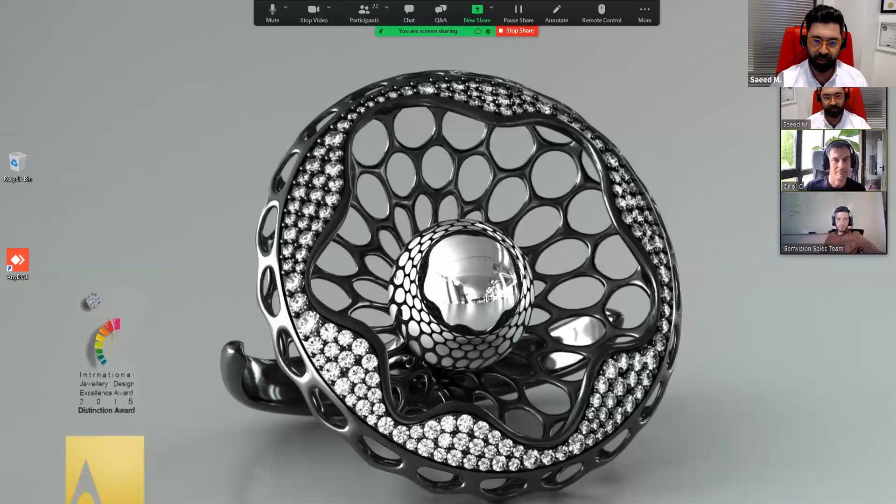Yes. Okay, so today I'm going to say some important things about the jewelry collection we did. Some of the sketches and renders—we always start from sketches, and then we make a 3D print, a 3D model in Matrix. I'm going to show you some of the sketches we are working with.

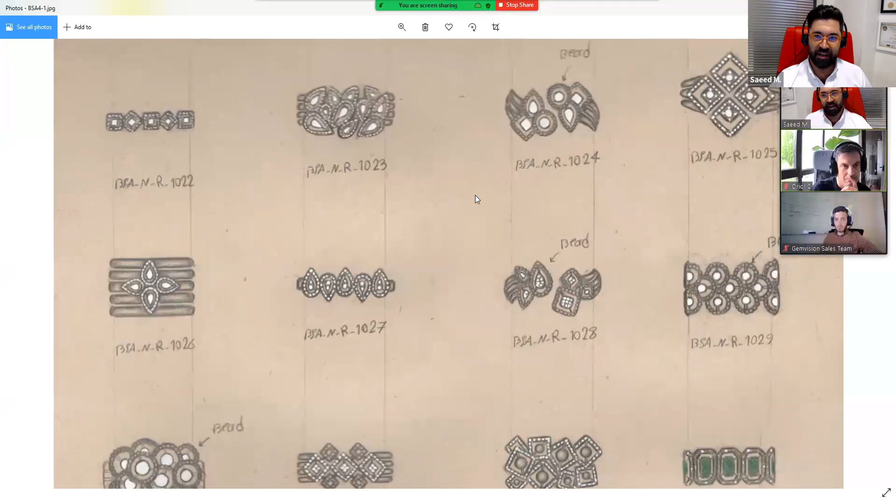We always start from rough sketches, something like that on a piece of paper. So we are going to start. Today we are going to start to work with some rectangles, pear shapes, or circles. This is the main rough idea, and then we make it a little more finalized, the sketches, and then we do the 3D model and make renders.

This is one of the biggest projects we did. There is a book, a brochure or catalog, with all the models done in Matrix and MatrixGold. Also this is the books Oriol talked about, these two books which we are converting to MatrixGold. As soon as it's ready, Gemvision can share it with the Matrix license owners.

Some of the designs I did in Matrix and MatrixGold won awards in countries like Hong Kong. Also, I did a bookshelf in Matrix, and it won a silver award in Italy. This was the bookshelf.

This is the plotted version, 2 meters by 2 meters, and this is the real one, with a carpenter who did it. This is the actual bookshelf—it was one of the most lovely things I did.

And yes, we've done many models—this is not the render, these are the models we made with many color stones, many models. This is the ring which won 2 awards, in Italy and Hong Kong. We've done many models in Matrix since 15 years ago—more than, I think, I didn't count it, but I think more than 20 or 25,000 models.

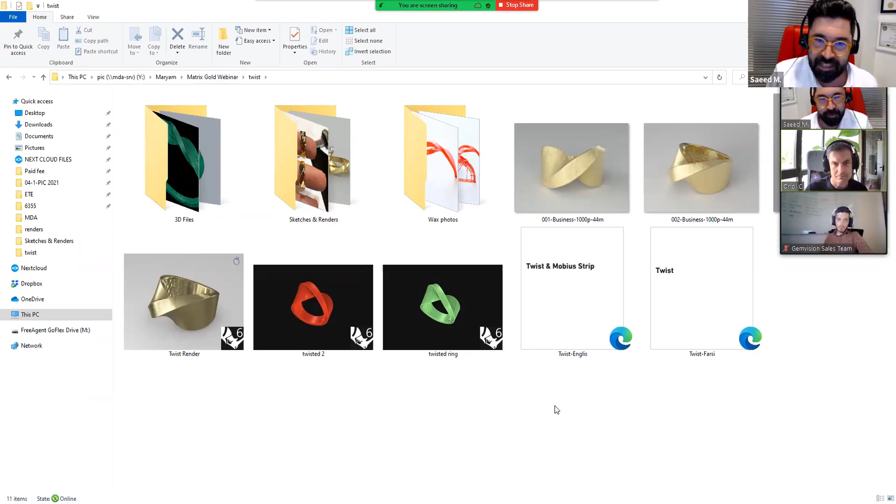So today I want you to see MatrixGold in action, and I chose a concept which is very important in jewelry designing: this is the Mobius strip. A Mobius strip is a sort of strip which, if you have a strip of paper for example, and you rotate it 180 degrees and connect two edges together, you will have a one-sided surface. There is no top and bottom of the surface. So if you start from one edge and follow the edges, you will come back to the same point again.

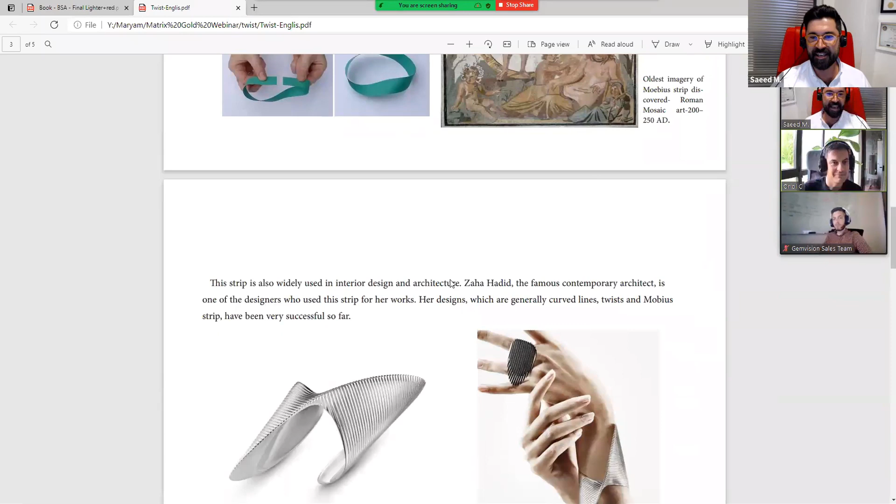And many famous designers and brands, famous architect Zaha Hadid, she did Mobius strip in this cuff bangle, and also Georg Jensen. This is what I did before, and these are the sketches based on the Mobius strip when you twist it.

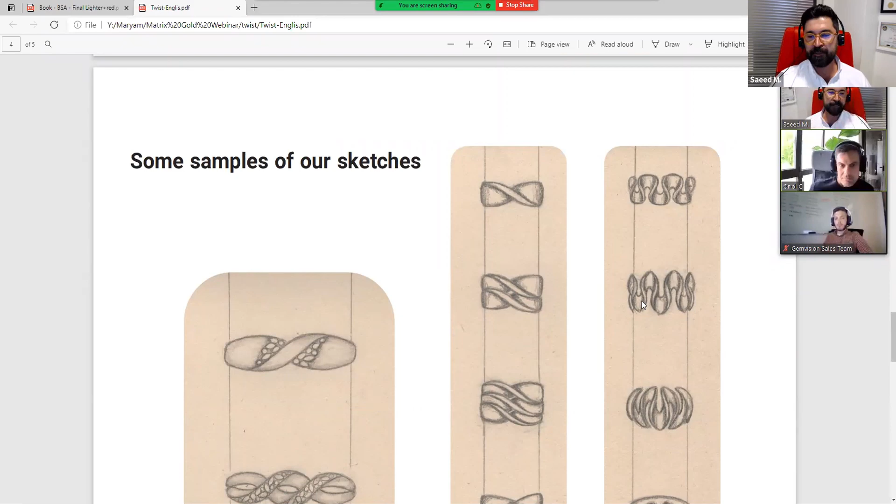So today I'm going to make this ring, with some tricks in MatrixGold. I'm going to show you how I can do it in MatrixGold.

I love all the history behind this model. Saeed, I really appreciate that, because it's nice to see how you get all the inspiration and how you then start to design the model. So thank you for that. It's very, very cool.

So for the Mobius strip, or for twisted shape things, I'm going to open up MatrixGold. I didn't change any user interface of MatrixGold, just some small changes. I just moved the command bar from the bottom to the top of the viewports, old-fashioned as I am.

This is one of the cool things about MatrixGold - people are always wondering, I'm used to the old software, but one of the peculiarities it has is that you can move all the windows from the left or right side of the monitor, and customize and do whatever you want.

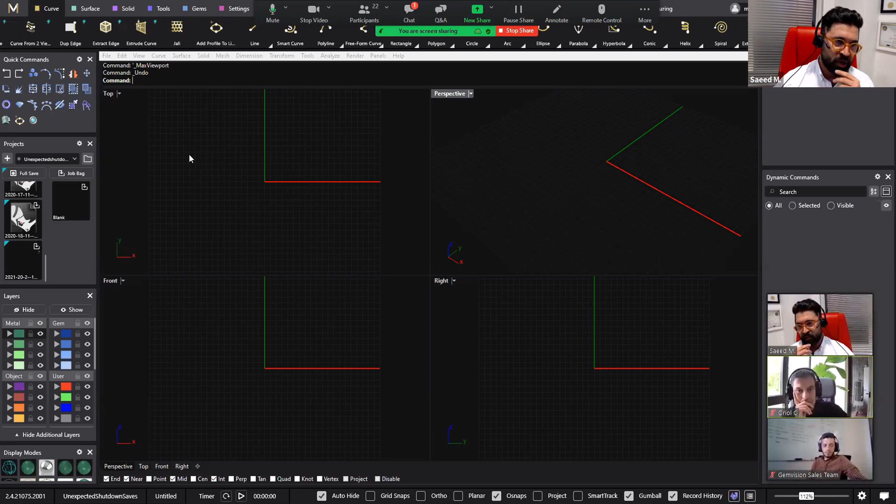Okay, so for every ring, when you want to start the model, you need the ring rail. So I'm going to start with a ring rail from the quick commands.

I'm zooming, is it okay to the people? I use some zoom. Yeah, it should be. Just kind of go slowly, that way the screen doesn't jump around. But yeah, it should be fine.

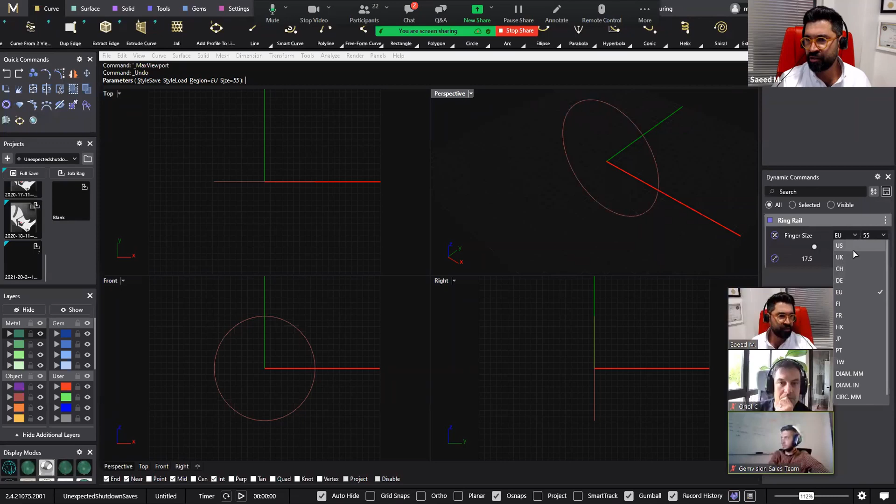Okay, so I'm going to start with a ring rail from the quick commands. It's very useful in MatrixGold. Click on the ring rail. Here we're using the EU region, so for size, for example, 55 ring rail size is equal to 7 in the US.

Also, the ring rail is one of the dynamic commands. For people who don't know, there's an icon here, which when you click on it, you can see the dynamic commands. When you see this icon on top of each command, it's a dynamic command, meaning you can change it afterward and everything updates.

So next step, this ring's circumference is 55 millimeters. So I'm going to draw a rectangle from the curve menu. And this is the rectangle. Let me move the zoom sidebar a little bit. Okay, so this is the rectangle.

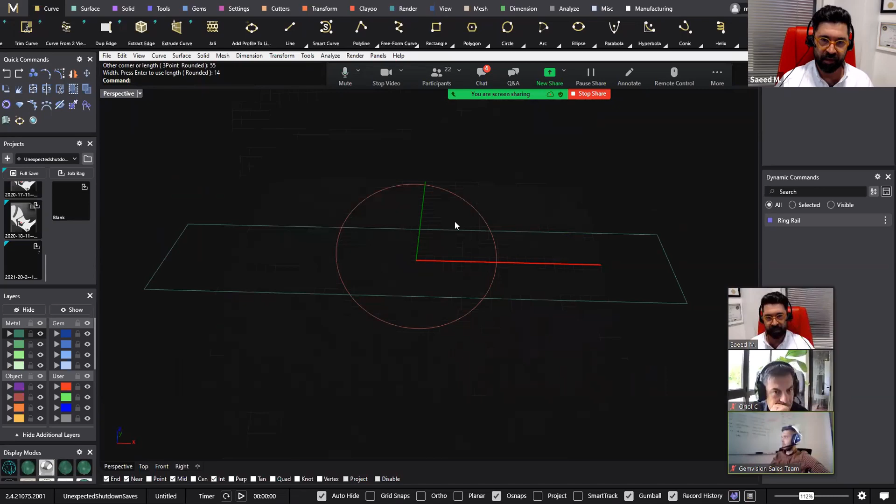I'm going to click on center on the command bar, then click F4 for center of the rectangle, and type 55 equal to the circumference of the ring rail. And for the width, I'm going to have something like 13, 14 mm. And this is the flattened ring.

I'm going to turn off the layer of the ring rail and maximize the top viewport and draw a line, a single line from the mid of the rectangle. I'm going to change the color of the layer to see it better, and you can even lock it. So we have a small horizontal line here.

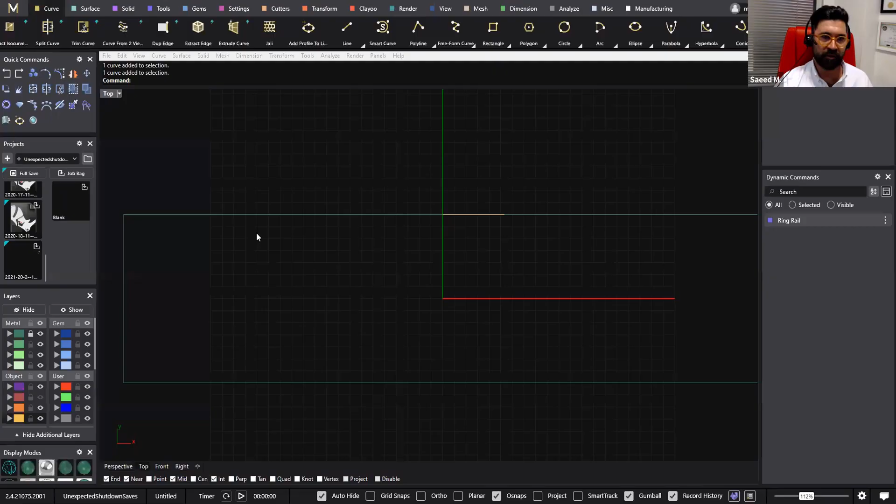Draw a single line again from the mid of the left side of the rectangle, then both sides, click on 3, hold shift to have a vertical line and another horizontal line from the end of the bottom of the ring. So right now I'm going to use the blend curve, which is dynamic in Matrix, and it's very useful.

Click on the blend curve and click near here and also here. In the blend curve command, I'm going to turn on flip first curve and flip second curve to have a smooth curve like this. You can also change the blend amount as you wish to adjust the blending.

Something like this is pretty good for me, so I press enter. I'm going to get rid of these two curves because I don't need them anymore, and mirror this curve from F4. I hold shift and then join these two curves together.

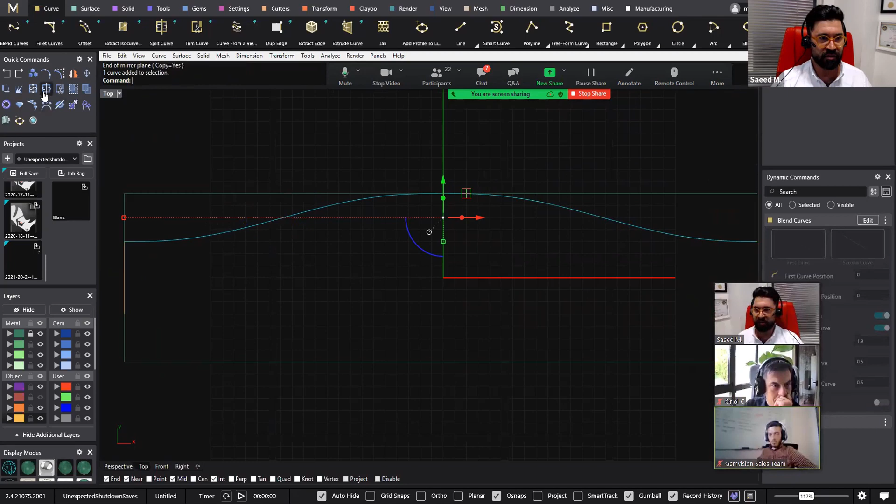I'm going to turn on the control points. For each curve, the control points play a very important role. So when you join two curves, you'll have a fracture kink or control point here. You can see when I move this point, the curve becomes sharp. We have a sharpness here.

So I'm going to delete this point. You can even scale 1D using the gumball to have a smoother, more domed curve here as you wish.

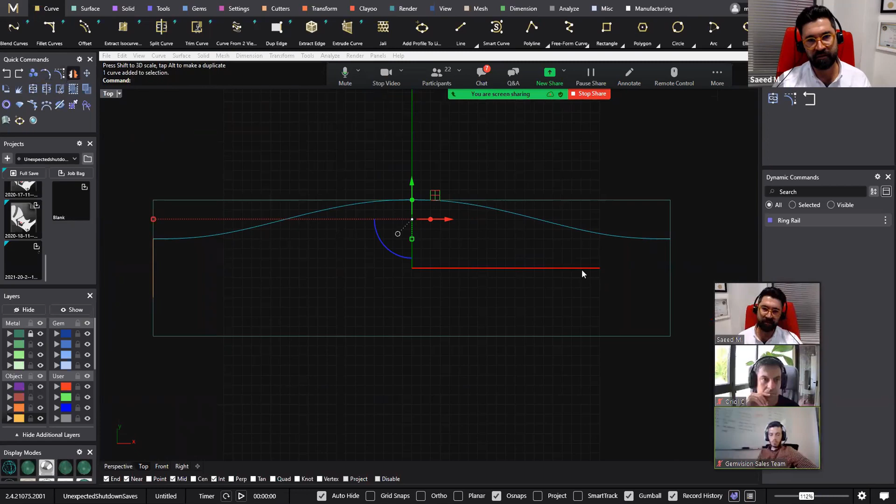I'm going to mirror this curve from F4 again to the bottom side, and also this one from left side to right side. I'll select all of them and then join them using the join command.

Oops, but it did join. So I have a closed curve here right now. Simply I go to the solid menu.

I'm doing it the easiest way with the extrude command. The only thing you should note in the extrude command is you have to turn on solid and turn off both sides. I put 2.5 millimeters in the command bar. So we have a closed polysurface like this.

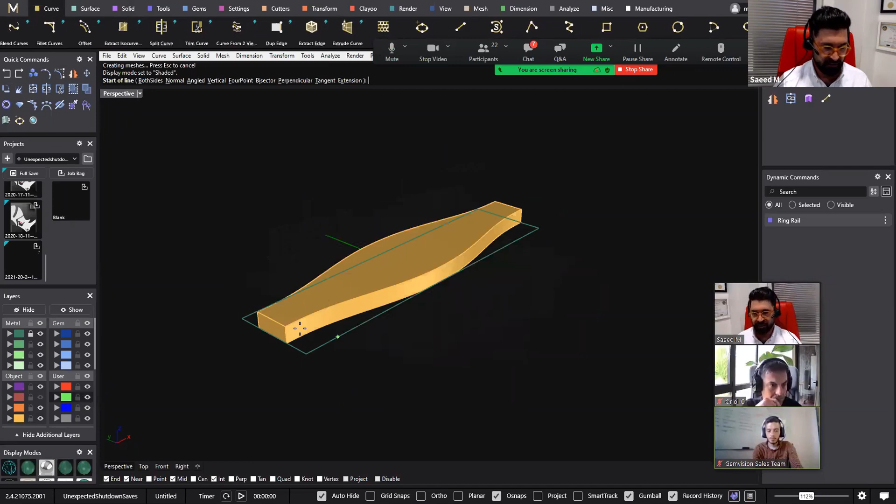Next step, I'm going to draw a line again from F4 with a different color, for example green, from F4 to the end of the midpoint of the rectangle. The reason I draw this curve is to find the midpoint of this green curve to split the whole ring.

Then again, I need another line, and I'm going to find the midpoint of this line and draw a line in both directions, vertical, using holding shift. Then I'm going to mirror it from F4 again to have it on the other side.

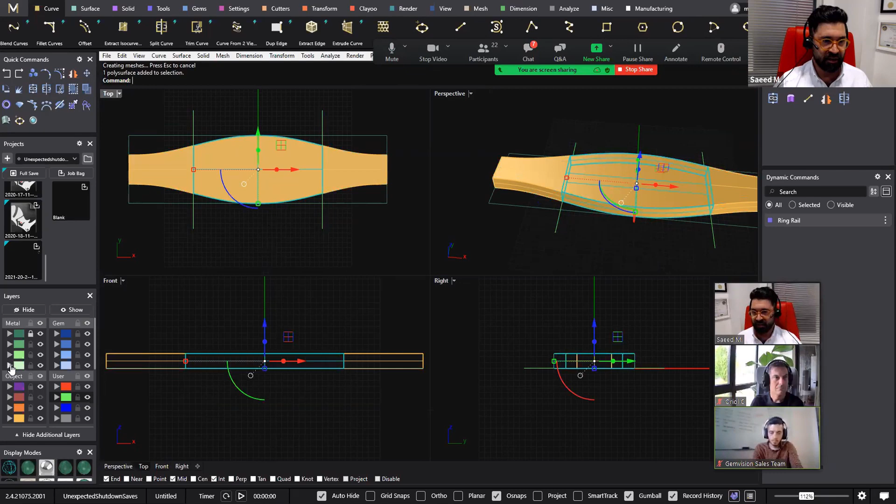Right now, I'm selecting the whole body and making it split from these two curves, and changing the color layer of the body. This is where this ring is going to be twisting. This is exactly here. So I just split the top of the ring from the shank, and I have 50% here and 50% on the top.

Okay, so I'm going to turn off these two bodies and click on the main body. I'm going to go to Transform and use the twist command, which is converted to dynamic commands now, which is very useful. I'll click on twist.

In the twist command, as you can see here, you just need to select a side. You don't need to draw any axis anymore. Before, we would have had to draw some curves to make an axis. You just need to select this side, and you can see it highlight. Then you will see the options.

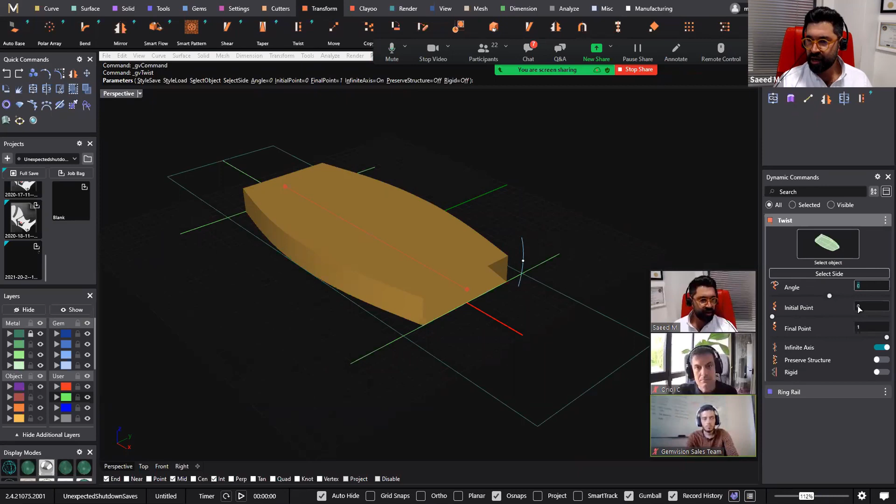There is an angle option, initial point, final point, infinite axis, preserve structure, and rigid. I'm going to put 180 degrees on the angle and hit enter. As you can see, I have the twisted shape, very smooth and very beautiful.

If I turn on the yellow layer to see the rest of the ring, you can see there are no smooth edges. When you want to connect these two parts in the ring, it's very smooth and curvy. If you turn off the infinite axis option, you will see it's going to be very smooth and nice.

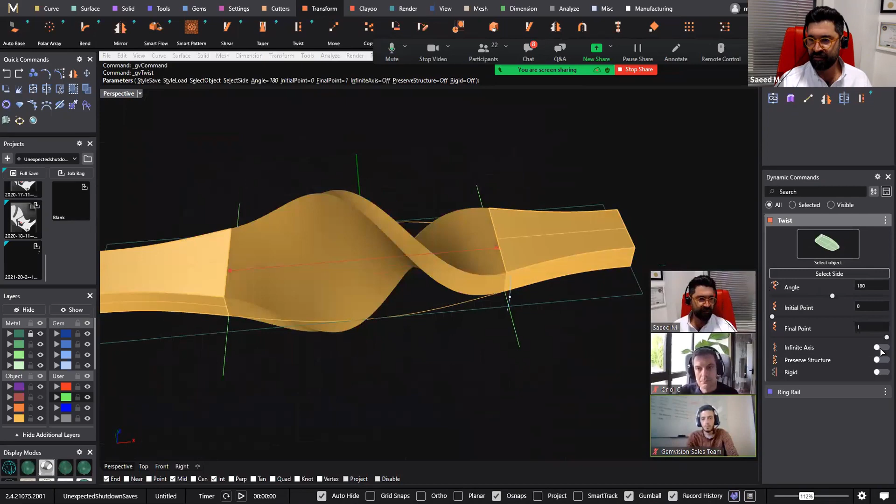See? You just need to turn off the infinite axis command and hit enter.

Right now I have the whole ring, but it's not the ring shape, it's flat. I'm going to extract and duplicate all the edges to have one shape.

Using the curve menu, I go to the from object toolbar and select duplicate edge. I change the color of the layer, and I will select all the edges one by one like this, because I'm going to work with the control points to get a very beautiful, twisted shape.

Okay, when you select all of them, you can click on enter and immediately click on join. To join, you can see it in the command bar, 12 curves, join it into 4 open curves.

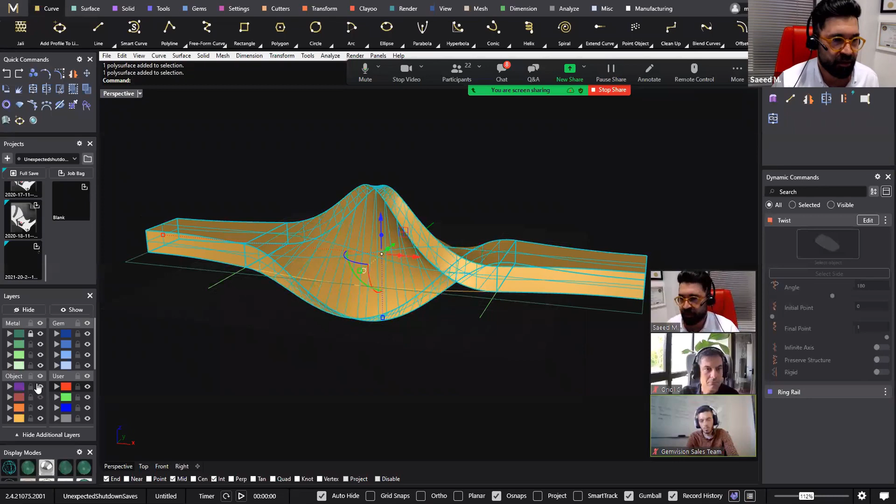I'm going to hide this shape. Right now, I just turn on the control points on these 4 curves. You can see in the area which was twisted, there are too many control points, and in the area that was extruded, there are fewer control points. If you want to work with the control points and adjust your model, you need fewer, minimum control points.

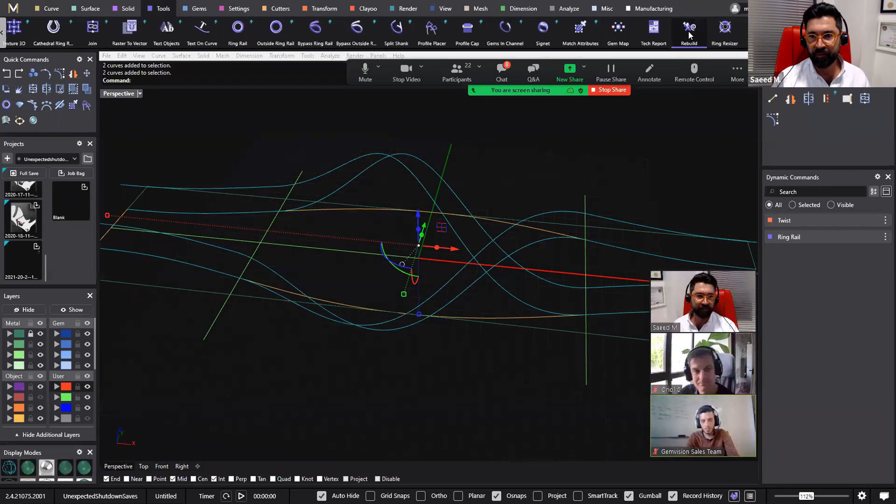It's very important. So I'm going to select these 4 curves, go to the tool menu, and use the rebuild command. Click on rebuild. In this area, as you can see, there are 184 control points, and I'm putting here 12 and degree 5. I make it degree 3 and hit enter.

And right now, if I turn on the control points, you can see there is a minimum number of control points maintained. I maintained the shape of the curves, but reduced the control points.

The next step, is it okay till now? Everything? Okay. It's amazing, Saeed. Okay. We love it. So okay.

I'm going to select this 2x2 curves and use the Loft command in the surface toolbar here, 2x2. The reason I'm doing this is I want to see the surfaces.

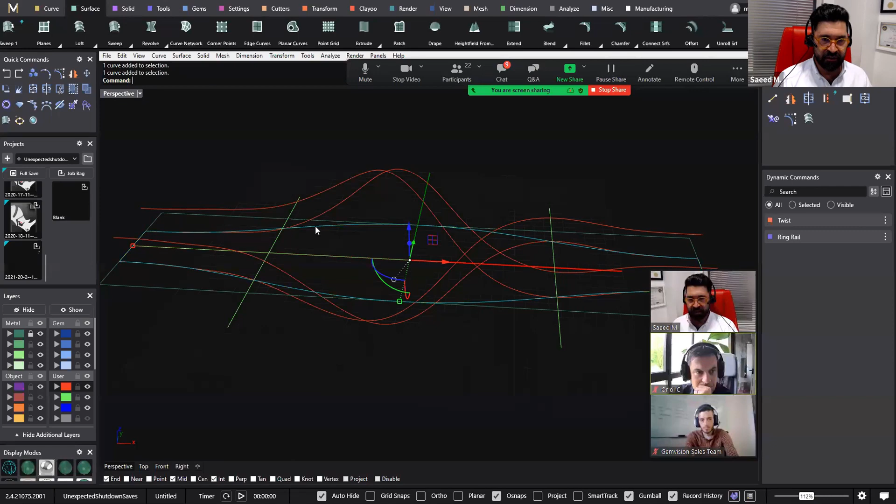Before that, let me hide these curves, it's easier to see them. I'm going to hide all of them. I'm going to select 2x2 and make the Loft command.

You should do it 4 times to have 4 different surfaces. So right now you will have a very smooth and single surface instead of a poly surface. It's always important to have a single surface. Whenever you can have a single surface, you should have it. You should make it a poly surface into a single surface. When you have a single surface, you can simply do whatever you want.

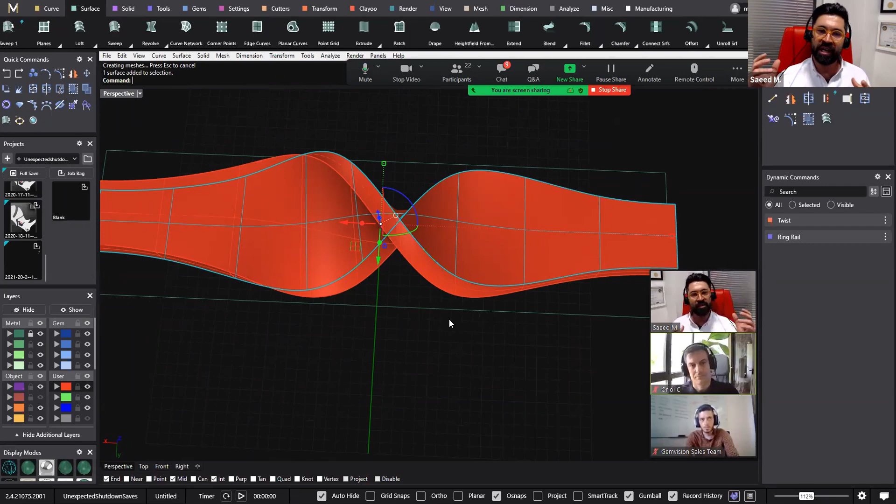You can convert it to Clayoo or T-splines before, you can rebuild it. For making layers and patterns, yes, a single surface is always very important. Or even if you want to extract an ISO curve, then you have just one surface to place all the stones. If you have different faces, then it's always more difficult.

The important thing in this step is to not join these curves, these surfaces. I'm just making them a group and changing the color layer, so I can see the curves and I can see the poly surface. I'm going to turn on the ring rail, and also I'm going to draw a line from F4 with both sides to the end of the rectangle.

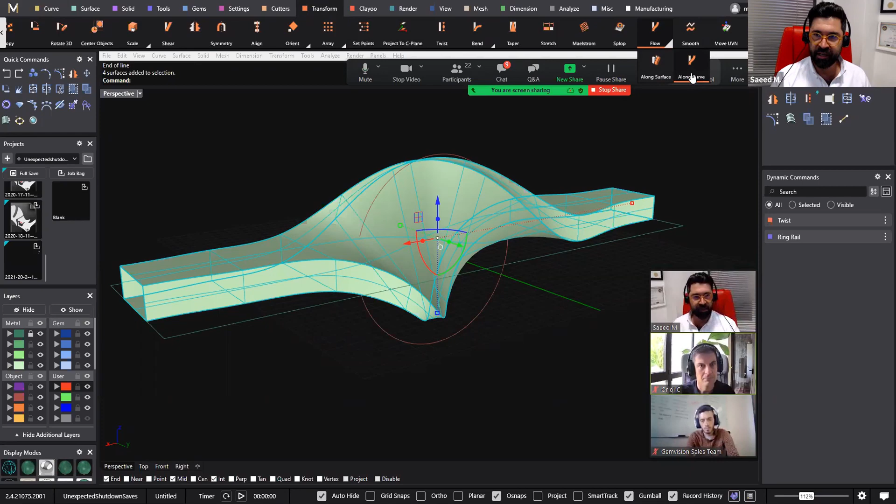So I want to use the flow along curve command in the transform menu. I go to flow and click on it. As you know, there are 2 kinds of flow, along surface and along curve. Here we can use along curve. I select the body and select along curve.

It needs the base curve, which is this horizontal line. The command bar mentions: select near one end. So I click here, then for the target curve: select near matching end. I click here, and as you can see now, it's vice versa and upside down. That's because of the seam point of each curve.

So I'm going to change the seam point of the ring rail from the top to the bottom. I'm going to use, in the curve menu, the edit tools toolbar, and in the sub toolbar, there is adjust closed curve seam. Simply, you can change the seam.

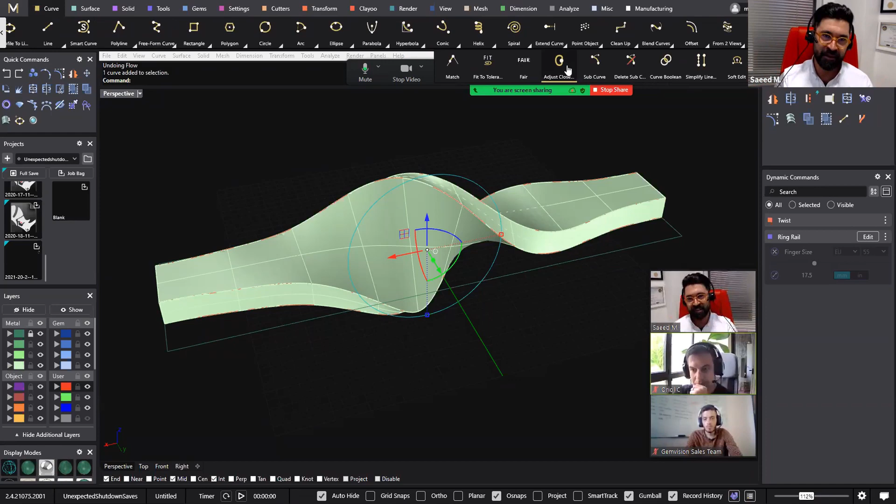As you know, each circle has a seam point here. If I make it something like this, these two connected edges, we call it the seam. Each closed curve has a seam, so you can simply change the seam point of each closed curve.

So I'm going to select on... where was it? Here. As you can see, the seam point here is at the 12 o'clock position. I simply click on it and drag it to the 6 o'clock position here, and hit enter. And do the flow along curve again.

I'm going to select it. The recent command in MatrixGold is amazing because in the upper right side of the monitor there's a flow along curve - you don't need to go to the transform menu to find it. It's very handy and useful, the recent commands. I click the flow along curve, base curve here, and target here. Right now, as you can see, it's good and it's okay.

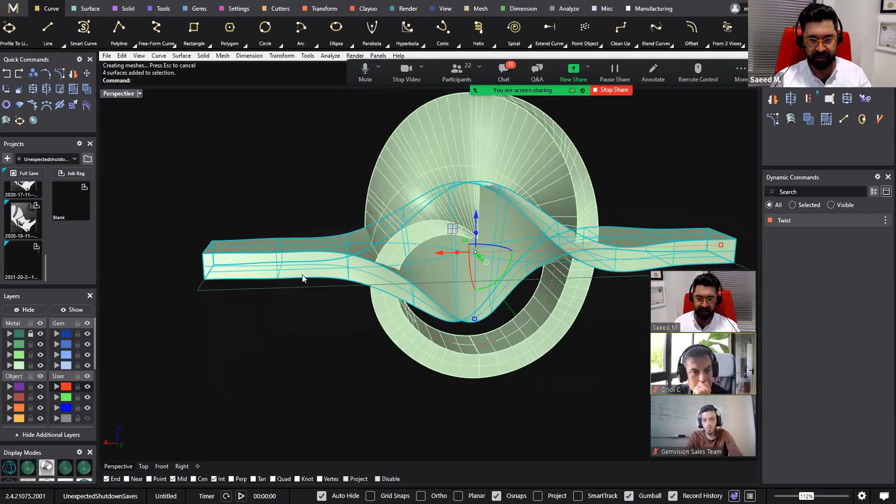I'm going to hide the flat body to see the ring. As you can see now, the big part of the ring came inside of the ring rail, so we don't have any ring rail here. From now, I'm going to work and play with the control points to adjust my model.

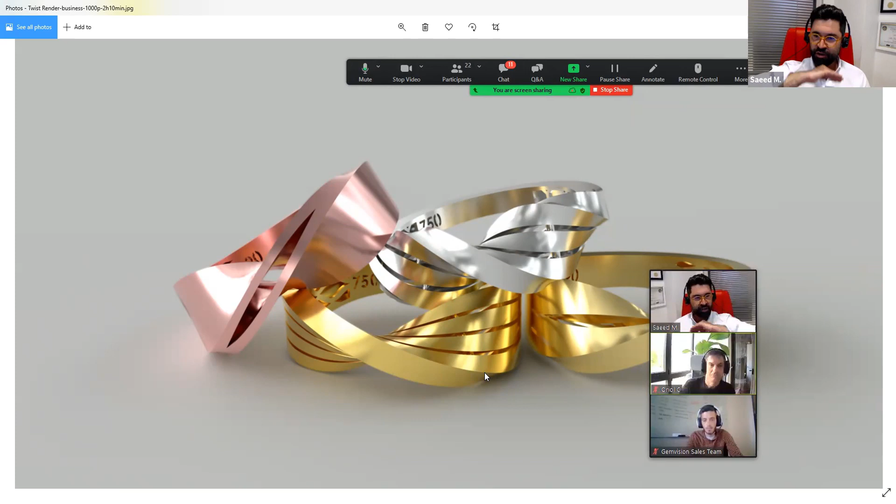Playing and working with control points, it's always very important to have very smooth and relaxed surfaces. As you can see in the Mobius strip sort, this is rendered with MatrixGold - there are very smooth and relaxed points and surfaces, and that's because of the fewer control points. This is the big and first rule: as much as you have fewer control points, you have smoother and nicer surfaces. This is the first step and first rule.

That's why I always reduce the count, the amount of control points. So I just turn on the points, and thanks to the history, Matrix and Rhino history, MG and Rhino history, if I change these control points and move it up, you can see you can simply change the shape of your ring, because I didn't join any surfaces and all things are in the history right now.

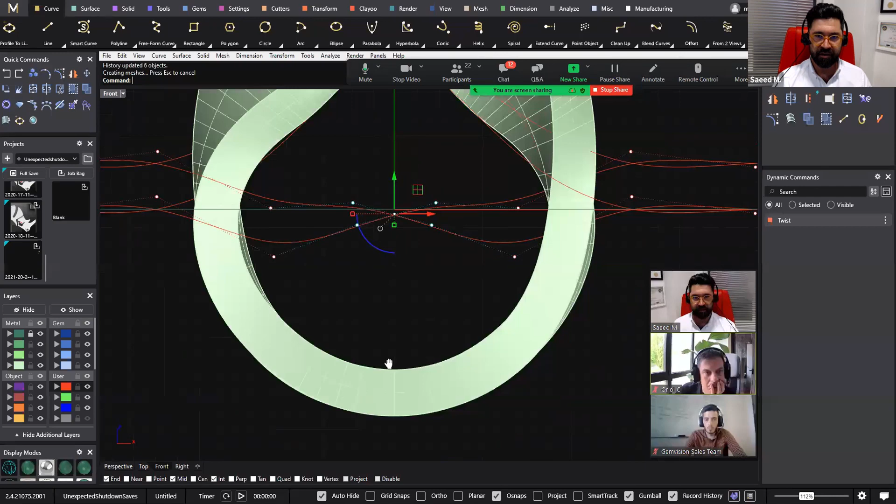So these two curves must be something like flat. I'm going to move these two curves upper, and it's important to select all four curves at the same time using the gumball. You can see I'm seeing the ring rail here, and also these two curves together.

And move it up, it's going to be better. A little bit more, these two, this. I'm going to hold the shift key - if you want to select points one by one, always you need to hold shift on your keyboard.

It's good now. Also this curve from left and right, I'm going to make it flatten. I'll also turn on, yes.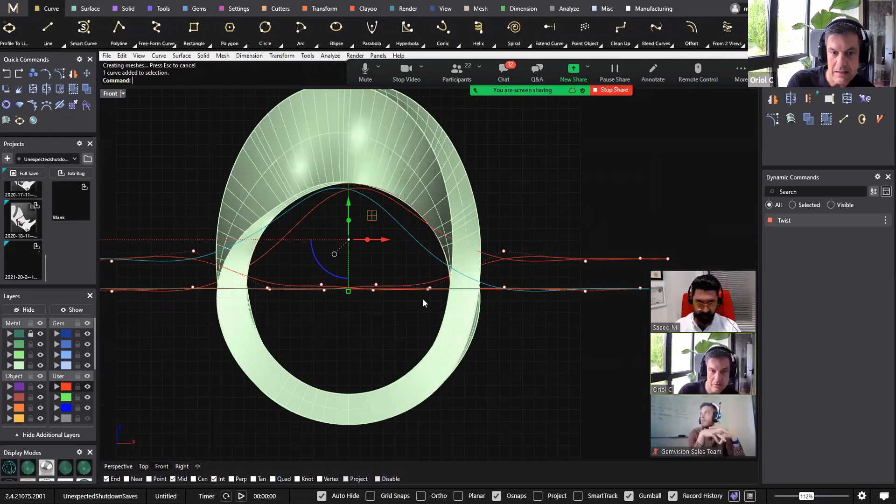Sorry, I think it's also worth mentioning that you are working now in MatrixGold - we have the history from the dynamic commands, but we also have the history from Rhino, that is actually what you are using now. At the bottom part, for any user here, you can see you have the record history tick. So if you look at the bottom bar, you have the record history tick. This is something that I like to mention. Thank you so much for reminding me.

The record history option should be turned on, and also record history and update children should be turned on. So whenever you have worked with history and change each point, you will see the result immediately. So I'm going to flatten these two curves.

Also for the bottom of the ring, this is 2.5 because I extrude 2.5. For the bottom of the ring it's too much and it makes the ring too heavy. And also when you want to bend your fingers, if it's too much, it bothers your finger. That's why in most of the models we use from 1 to 1.5 mm, maximum 1.7 or 6.

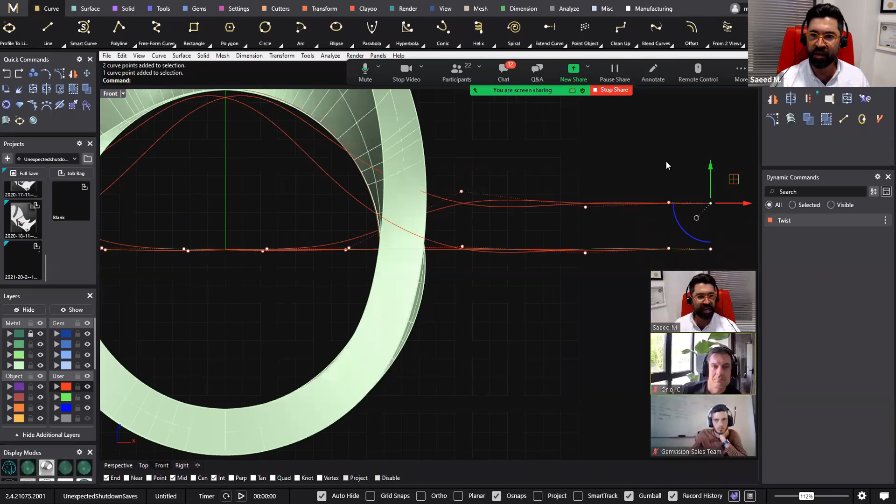I'm going to select these 2 points at the same time, not just only the last one, and also these 2 points at the same time to maintain the tangent surface. And I will reduce it a little bit more.

As you can see, if we go to the perspective and see here, we have a deformed surface. That's because I didn't turn on these 2 curves as well, control points. Because it's a twisted shape and a little bit complicated surface, you need to turn on all 4 control points together, see these 2 and these 2, and move it a little bit down.

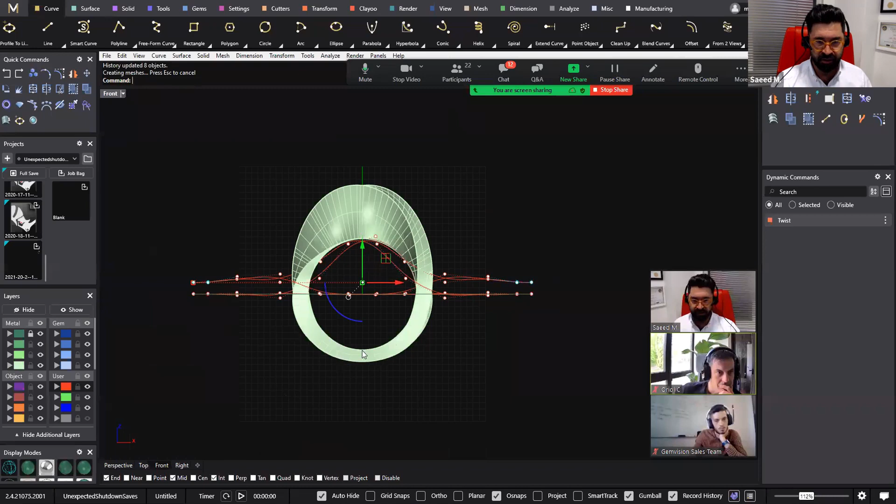So when you're working and playing with control points, another trick is making undo and redo. When you make undo and redo repeatedly, you will see the change. And if you're happy with what you did, you can go further. If you're not happy, you can make undo and do other things.

And also these 2 curves, I make a little bit down. So right now it's not bad. And also this one and this one, you can see we have a small issue here. Right now it's solved.

And even you can go in the 4 view, and also especially in perspective, I'm always rendering it to see the shape. If I'm happy with the result, I go to next step.

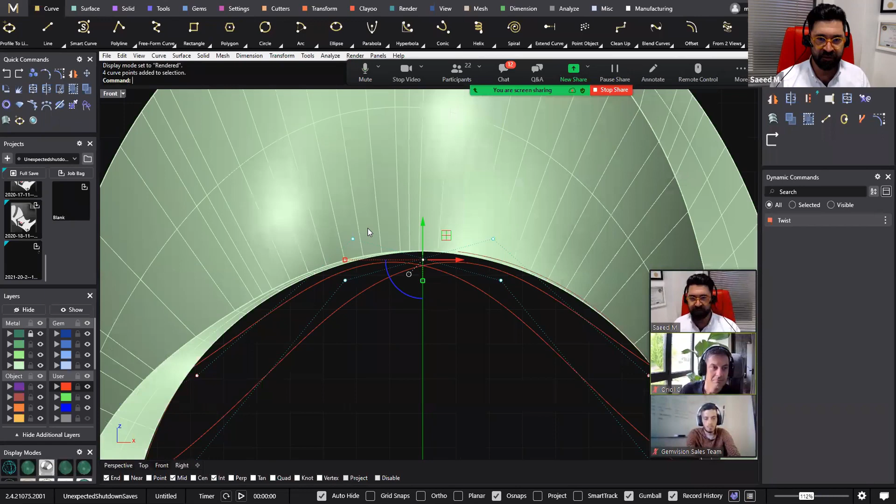Right now I'm seeing it's a little bit too tall here. So you can simply select these 4 control points from the front viewport and move them down to reduce the height of the ring. You see, it's very easy. Something like 4 or 5 mm.

It's a fashion ring, sort of fashion ring, so it's okay. Even you can do a scale 1D on these 2 curves, so you will have a thicker surface on the top of the ring in case if you want to put some gemstones.

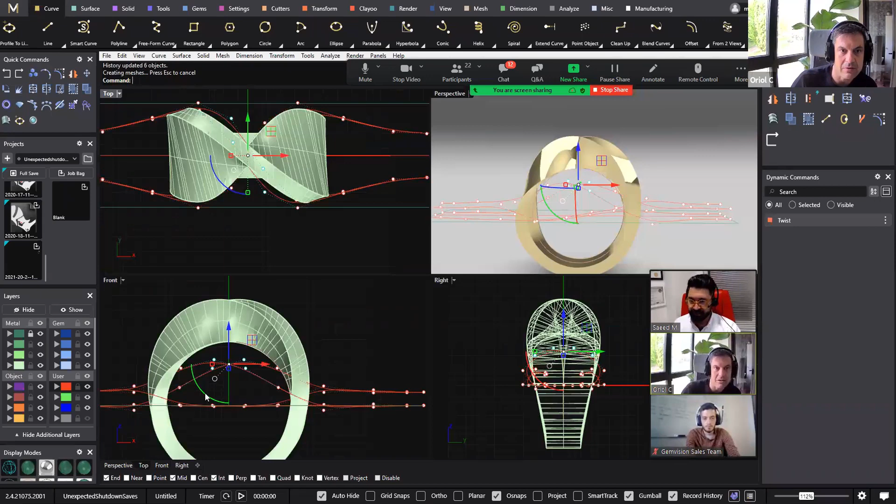Yeah, just with all the controls that you have, Saeed, you have a lot of power to make any shape. Exactly, now you have the total control on this ring.

And also the last issue I'm seeing on this ring, we have a little bit hard edge here, sharp edge, see? So if I turn on the control points, I need to find which one belongs to this area. So I think one of these, or this on the top. If you are not sure, simply you can move 2 of them and you can see the result.

So if they are your points, you can use them. If they are not, you can simply undo them. So I'm going to select this one.

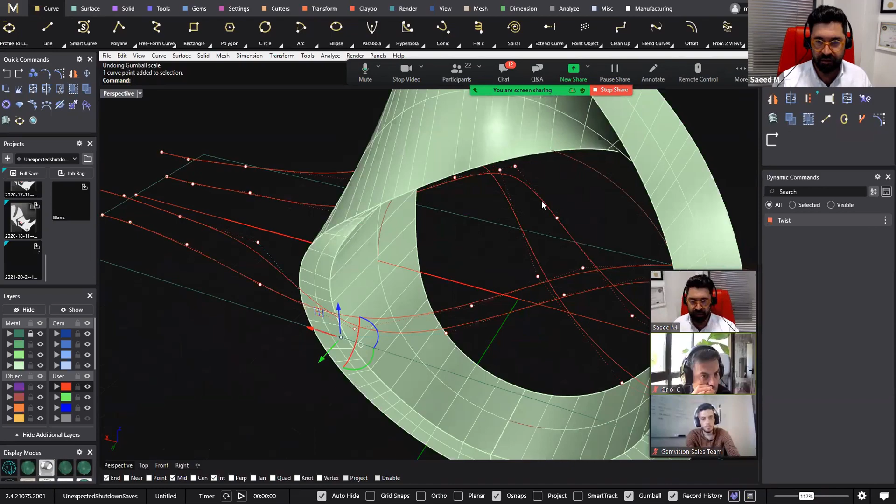For example, this one with the points on the other side, making a little bit of scale 1D. See here, it was something like this, and it's now like this, or the other one, this one with the other one on the other side.

Okay, I do a scale 1D a little bit more. So it was a little bit too sharp. And when I reduced and changed the place of these control points, it's okay now.

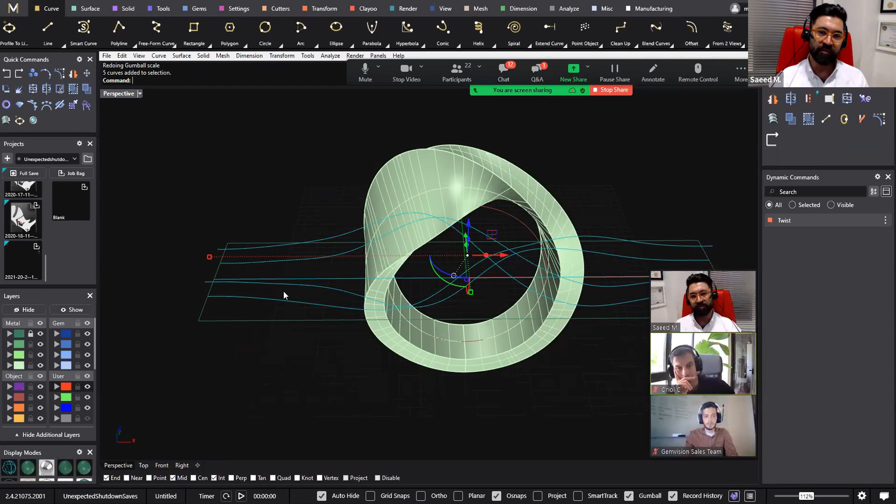Okay, so whenever you are happy with the control points, you can turn it off. Usually we are working with control points for hours because it's the foundation of your ring, the foundation of your design. And if you want to have a very smooth and very nice surface, you need to be more experienced at working with control points.

It's very important. So I'm happy with this, Saeed.

Yes, and sorry Saeed, I like what you're saying because we built in MatrixGold the dynamic commands, tools that at the end of the day use what you are saying in the background. All these control points, all these lines, that's how we make the dynamic commands. But when it's time to do something as specific as you are doing here, I really like what you are telling today because we are showing everyone how to have, as you said, the foundation of this software. Exactly.

Okay, I'm doing final touches on the ring. And then we go to the next step.

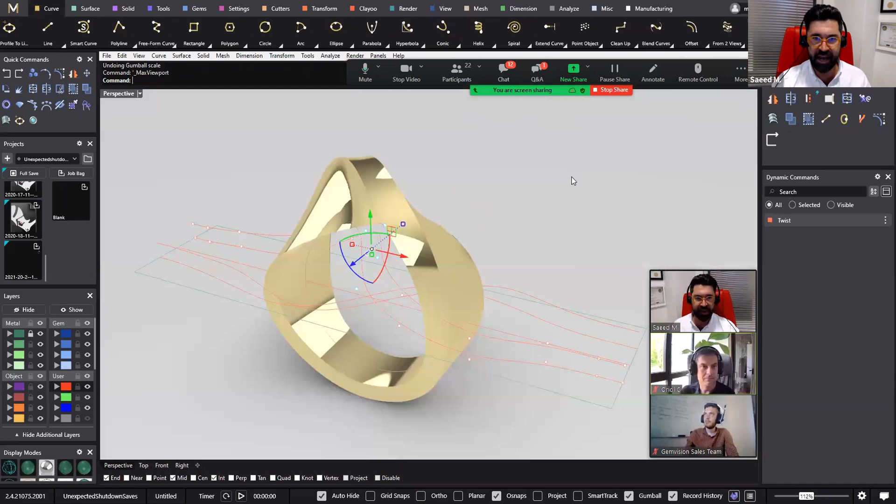Is it okay now? For now, it's okay. And I will turn off all the control points. And also, unlike the rectangle, I don't need them anymore.

And I'm going to the front viewport and draw a line, something like 45 degrees, and mirror it from the F4.

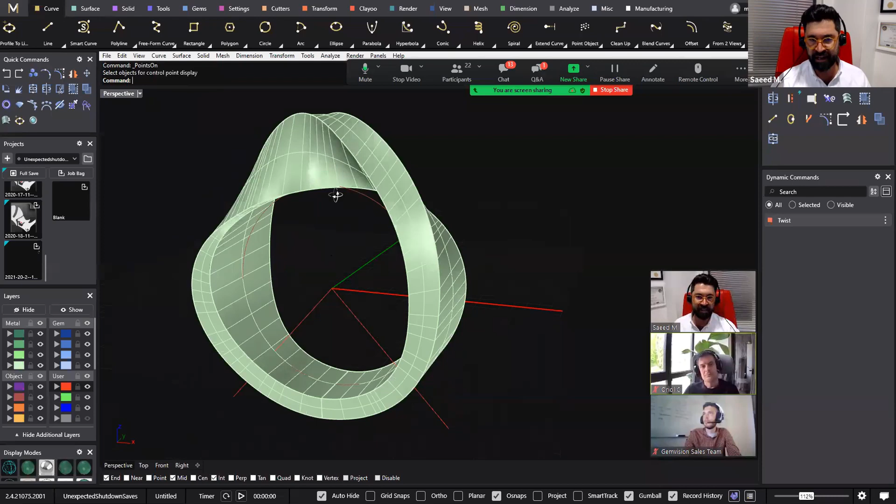I'm going to join these two together. And before that, it's grouped surfaces. I will ungroup and hit join. When you do the join, for the listeners I'm talking to, if you do join, you break the history of the first control points, and if you change the control points from that to the main control points, it doesn't update anymore. So it's very important not to join the surfaces. It was just grouped, okay.

So I'm going to split this ring to make it hollow because it's very heavy right now. Where is the split here? And with these two curves, so I will have a red bottom of the ring and the top.

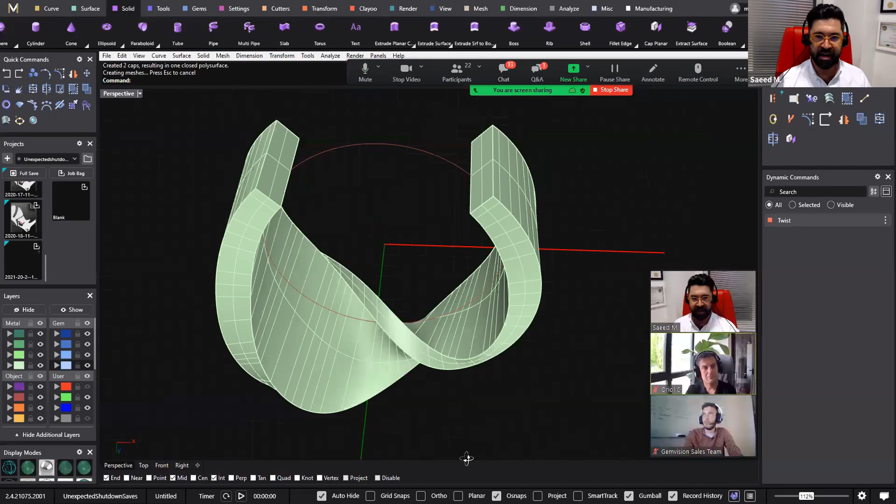I'm going to ungroup it, hide it, and do the Cap Planar from solid menu. This is the Cap Planar to make it a closed polysurface. And right now I want to make a shell.

I do the shell, select the shell command. For this kind of ring, this is plain gold. There are no gems on this ring.

So when we talk about the wall thickness of the gold, it depends on whether you want to do a direct casting or make a rubber mold, what kind of diamonds or gems you have in your ring, and it depends on the diamond setting method. You can increase or decrease the wall thickness of the gold.

Right now I do 0.40, or even right now in the world they use 0.35 mm wall thickness for the shell because of the gold price. If you want 18K gold or 14K gold, right now in the Middle East, in Europe, because of the economic crisis, the COVID-19 crisis, all the gold and jewelry manufacturers try to have a big shape with the minimum metal weight. It's very important to have the minimum metal weight.

So I do 0.35. Right now some companies in Turkey, also in Iran, also in Italy, are working with 0.25 mm, which is very, very thin. It's not very good because when you press on the ring or apply a little pressure with your two fingers, it's going to be deformed. You know what I'm saying?

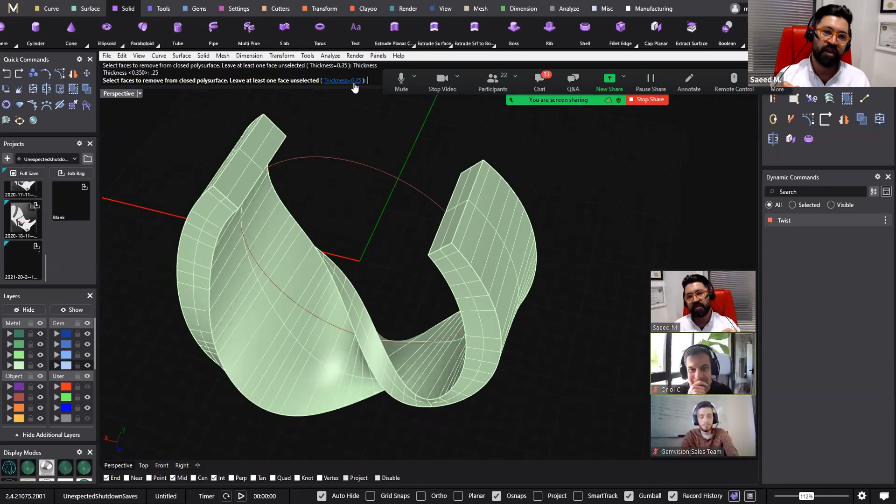I remember 15 years ago we did wall thickness of 1.0 millimeter. After 2 years, 0.80. After 3 years, 0.70, 0.60, 0.50, 0.20.

It's crazy. Okay, I select these two surfaces. This is thanks to the new technology. A few years ago we couldn't have this, but today we have printing and casting machines that are able to do that. Yes, exactly, it's amazing.

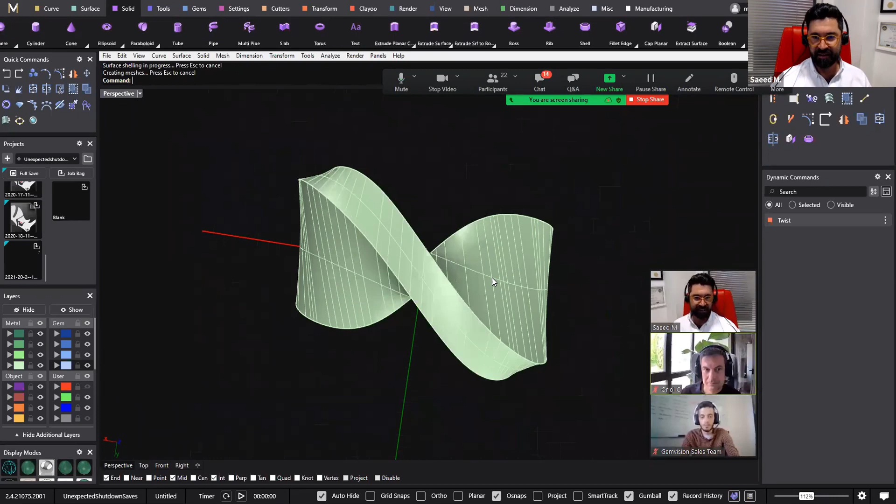I select these two surfaces to make a hollow and click enter. As you can see, it's all empty inside, and we have a wall here and a wall here. Because 50% of this surface you are seeing from the top of the ring, and another 50% of the surface you are seeing from the bottom of the ring.

It's very important, you cannot simply make the hollow from the bottom side of the ring because it's twisted. You know what I'm saying? That's why I did it like this.

Okay, so next step is to extract a surface. I want to extract one surface using the extract surface command in the solid menu. In the extract surface options in the command bar, I click on copy from no to yes to have a copy surface, and I click on this surface to have it extracted. I'll change the color of the layer, make it blue, for example.

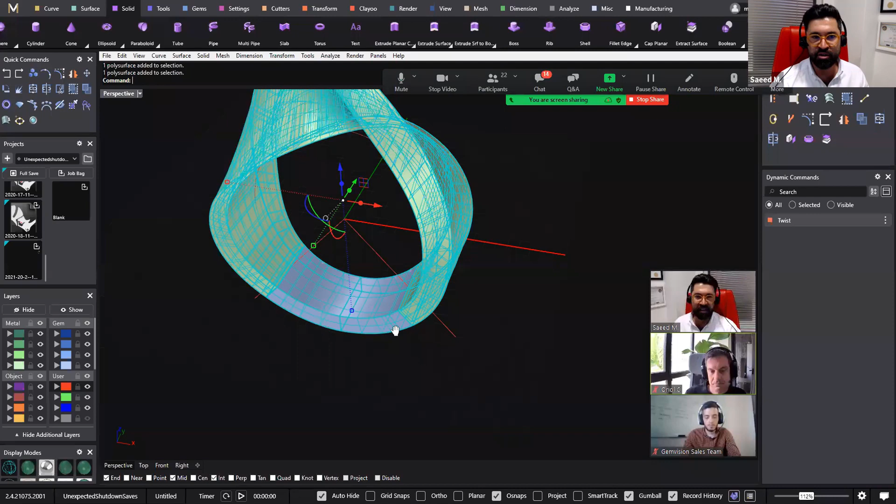This is the surface which we want to have a pattern for making the lace, to open it. Because for the casting, if I join these two polysurfaces together, it comes out again filled with gold. So we need to have it open work and lace, open lace here and here.

So I'm going to select this surface, the red one. You can simply lock the other one and click on the split command. Here. When you're selecting a single surface, there is an option in the split command which is isocurve, so it will give you a virtual isocurve. You don't need to draw a line, so fewer clicks and more speed.

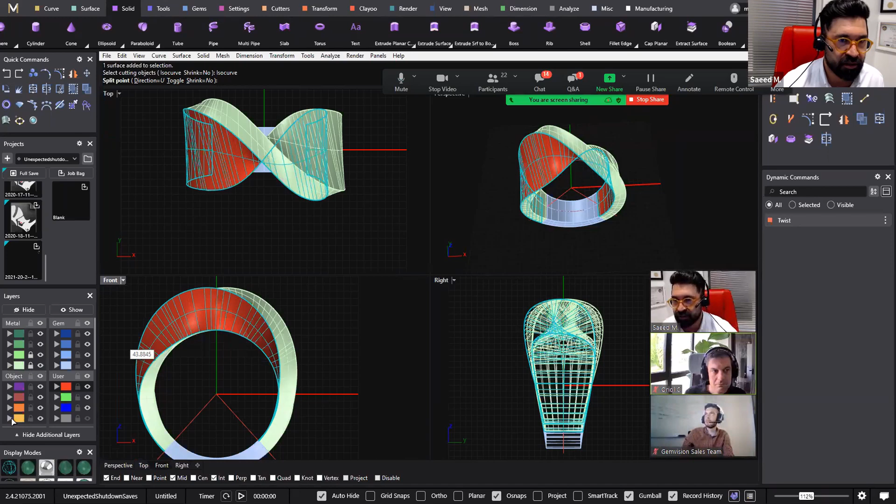I click on isocurve, and I'm going to change the layer as well so you can see the yellow isocurve here. If this is like a clock, here is 12 o'clock. I'm going to go from 12 o'clock to something near 1 o'clock here and click on split.

Oops, I think this is because of the connection. You just need to go to the launcher and launch again, and everything will go back to where you were. This is because of my internet, just launch it again. Okay, I launched it. You should do that even if you log out and log back in, just go to where it's... oh yeah, that's ready. Okay, that's it. The internet connection here gives us some difficulties.

Okay, so I did not save my model as always. Yeah, but it's good, it's a good occasion to say that when this happens, if you log in as you did, you recover what you were working on, in case you have 5 minutes to do that. In case you don't recover during those 5 minutes, the next time you launch the software it asks you exactly to recover, a pop-up window asking if you want to keep working with what you were working on. So I'm glad this happened so we can tell everyone about this workflow. As long as you don't get a Rhino crash, you're good.

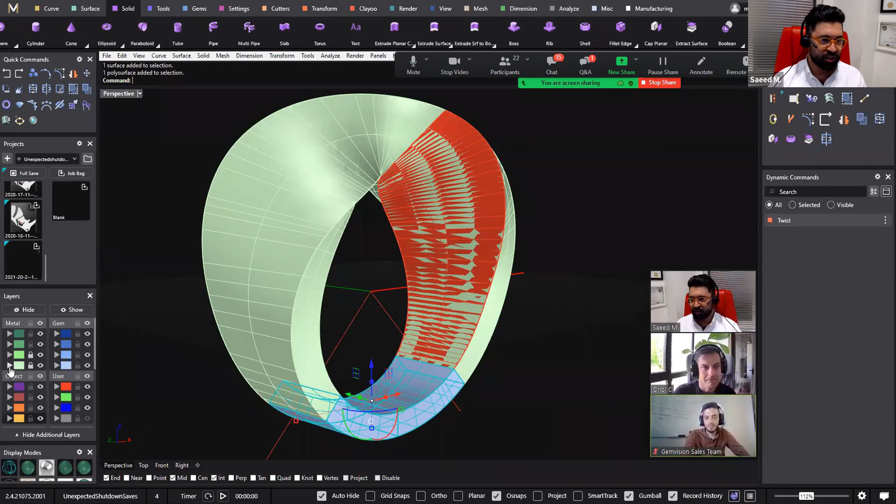Okay, so we have a red surface here, which we want to do a pattern on. I'm going to change this layer, hide it, hide the ring rail, and get rid of these two curves to see it better.

I need a curve around this surface. So I'm going to go to the curve toolbar, from object, and select duplicate border to have a border around the surface. Then I use the offset on surface command to offset this curve inside the surface.

The reason I'm doing this is you always need a plain gold width here, because these patterns should not be very near the edge of the ring, due to filing, polishing, and casting the gold. It's very technical and important to have an offset here, and also for making a Boolean difference and creating lace like this, we need a plane surface.

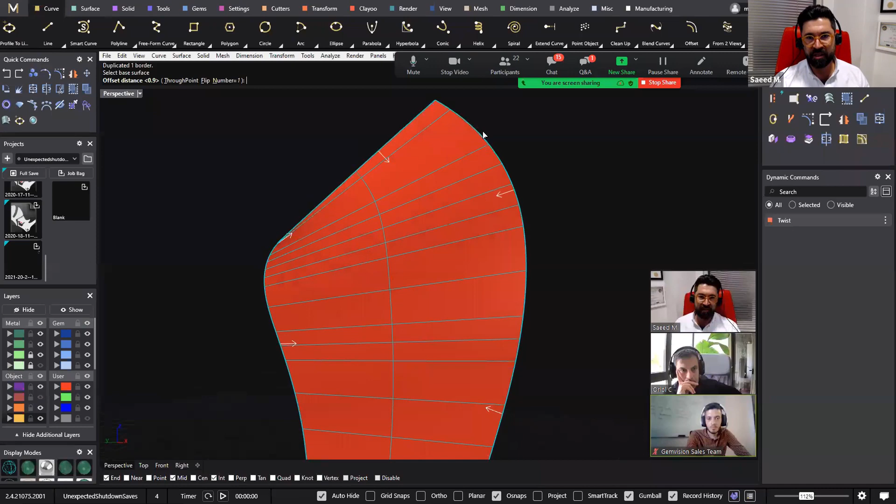So I'm going to have something like 0.8 or 0.9 mm, from this edge to here, 0.8 or 0.9. Usually, if it's not twisted, you can have 0.50 or 0.60, but because it's twisted and a complicated surface, I did 0.90 or 0.80.

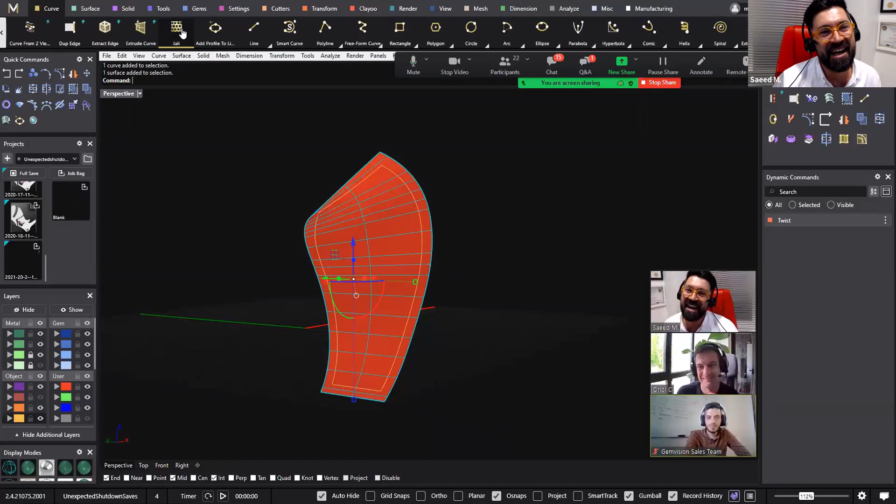I'm going to use a very beautiful command in MG called Jali. I like this command, it helps you do more in less time, in just a few seconds. The Jali command lets you make a pattern on any surface you want in a very nice and smooth way, and there are too many options in this command.

Simply, you need to have a surface here, and when you click on the pattern window, you will see very nice and beautiful patterns which the Gemvision guys made and spent a lot of time on. Thank you so much. Plus, these are path files.

So sometimes people ask us if they can add their own Jali. This can also be done. The only thing you need is another software to create a path file, and then you can import it into this library and use it later on your surface.

When you want to do some lace work, you will have two kinds, let me find the picture. It's always better to have the negative space, to make the difference from the ring, so you end up with one part object at the end.

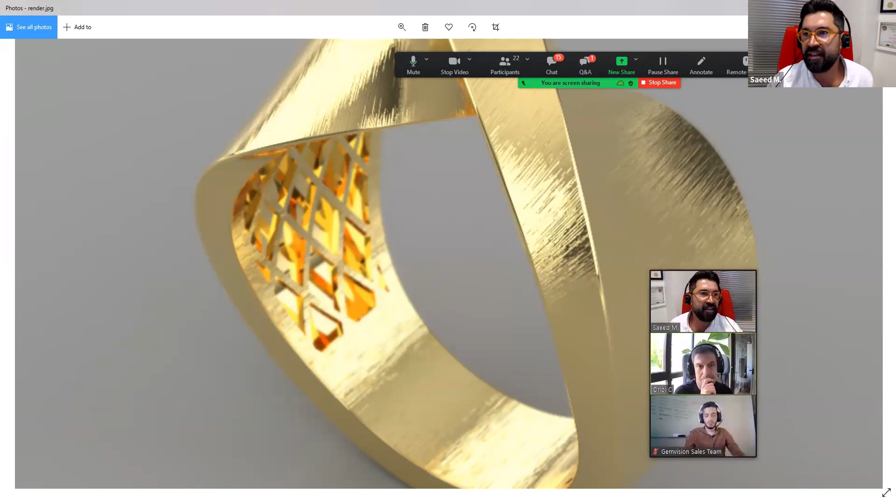That's why I'm going to find a closed form shape like this, number 23, click on it and hit select. As you can see, we have too many lozenges here, rectangular or diamond shaped, and they are very small at first.

I'm going to increase the scale option in the Jali command. One step more, it's still a little small for a ring, for a lining, and this size looks good to me, or even this size is good for casting. You can simply adjust it. I'm going to select this one because it's a little more beautiful, and hit enter.

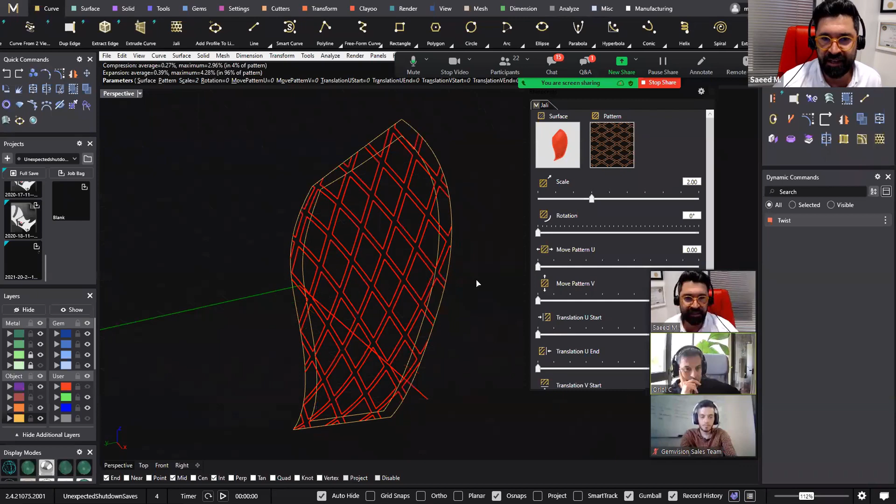So right now I have the curve. The reason I offset this curve is to maintain the lozenge shape. I'm going to get rid of this curve and select all of them. It takes less than a minute or two to trim around these curves and get rid of the extra lines. Before doing that, it's always better when you do lace shapes using any software.

It's always better, especially in MG and Matrix, to do a pullback surface to make sure all of these patterns are laid down on the surface. So I'm going to go from objects and select pullback. Just make sure the delete input option is on, and click on this surface. It's locked, so I unlock it and hit enter.

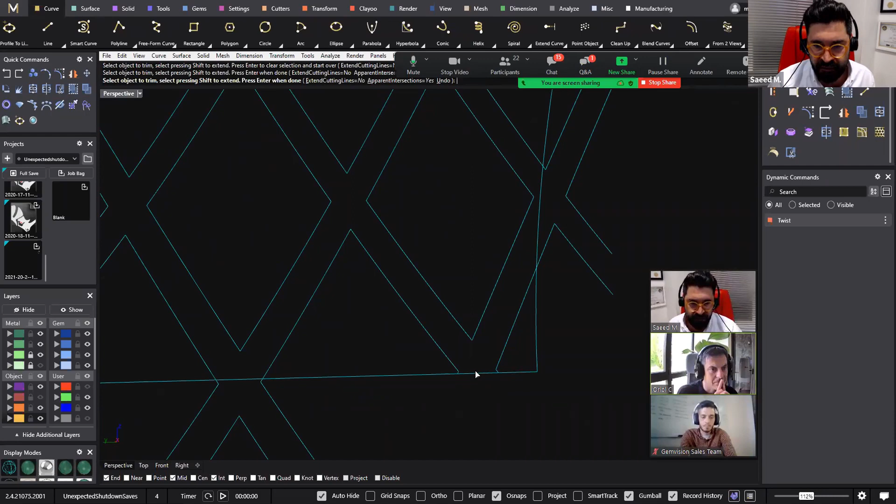Right now, everything is okay. I'm selecting all the curves here and clicking on the trim command, starting from here. I want to have the lozenges or diamonds here, so I'm going to get rid of the curves between the lozenges, like here, here, and here.

It's not so hard, and I always have fun when trimming. When you're using the window selection, you go pretty fast. Sometimes people think, oh, I need to go one by one, but when you use the window selection as you are doing now, actually it's pretty fast.

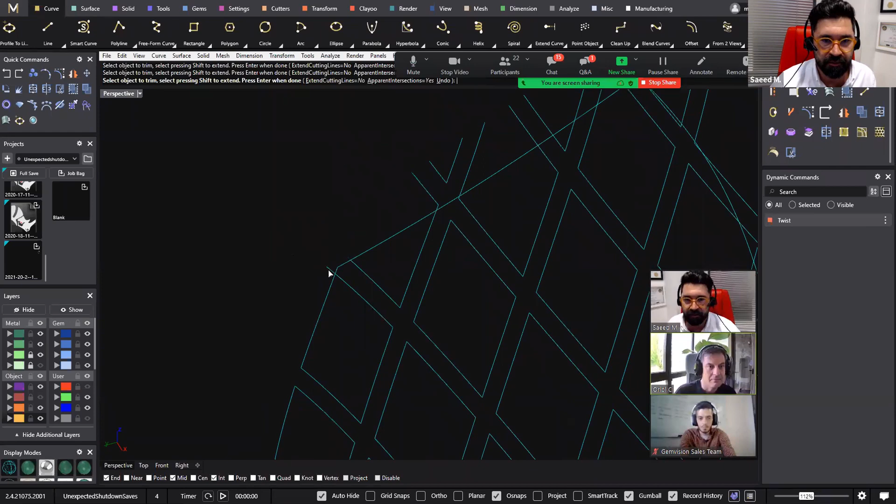The most important thing: if you accidentally trim a curve which you didn't want to, you can use the undo option within the trim command instead of using the general undo command, because the undo command undoes all you did.

There is another important thing when you're making lace patterns, you're going to have some small patterns like here. It's not good for casting if it's less than 0.40 or half a millimeter to 1 millimeter. That's why in these cases, we will delete these shapes as well, because after the casting and after the polishing, it just looks like a teeny hole.

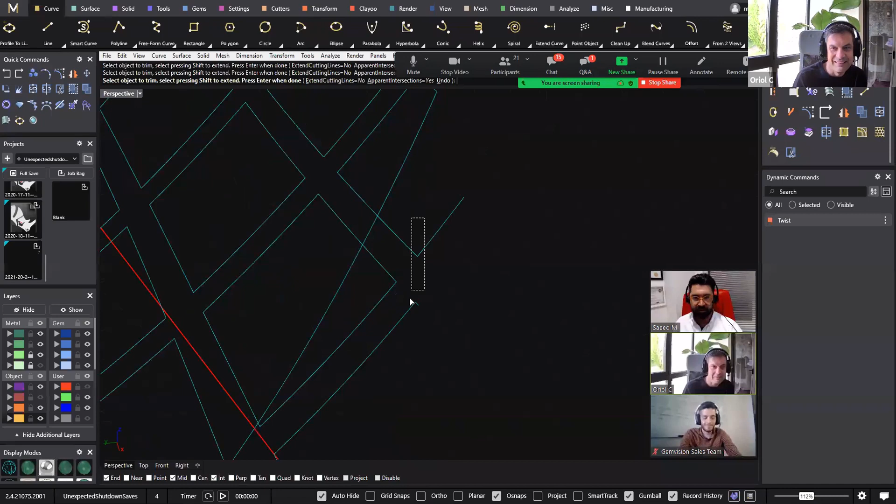Oriol, probably you can talk about this from when you were in CAD camp, right? Yeah, oh yes, those tiny holes, man. You have to get rid of them. If not, they'll blow out whenever you're casting, or they'll fill in unexpectedly, and you have to take care of them.

I just click and hit enter after finishing the trim and do the join command. There is a very important thing when you're doing this: if you see in the command bar, it says 183 curves joined into 40 closed and 11 open curves.

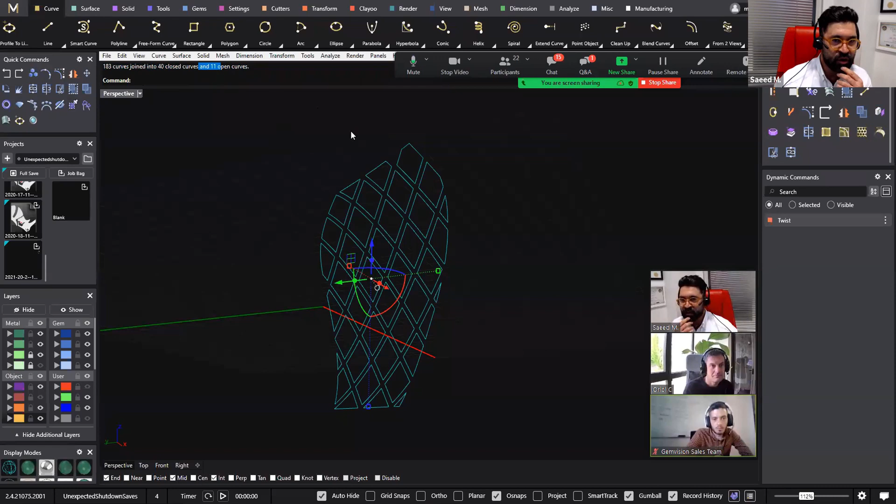So maybe when you're doing this, there should be some small teeny curves. What I'm doing in these cases, I just simply type open curves. There's a little bit small curves here which are very small, so I cannot even see it. Again, so open curve, you see the gumball here, so there's something here, and I click delete it.

For making sure I have 40 closed curves, I sometimes do this: I select all of them, click on explode, and click on join again. And you should not see any open curves message here. You see in the command bar it says there are only 40 closed curves. So it's okay, that's it.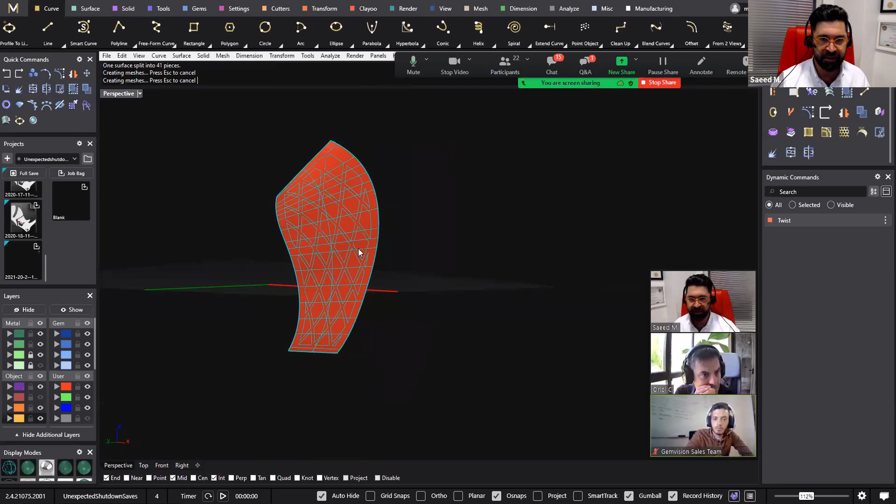I'm going to turn on this single surface and click on split, and click all these curves, or select it from the layer, and click on this big surface and delete it. As you can see, we have a very beautiful lozenge pattern here.

I select all the surfaces, go to the surface menu and offset surface, and do the offset surface. Just make sure the both sides option is turned on, yes, and also solid, yes.

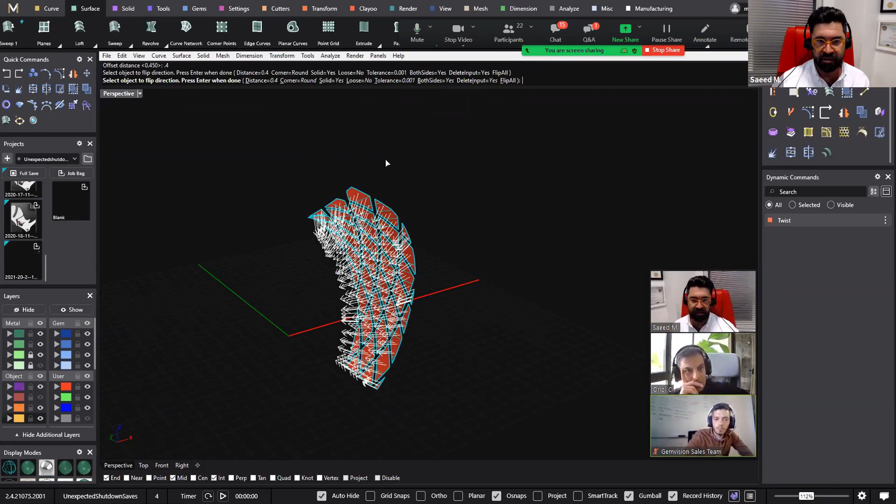How many wall thickness we did in the shell command, which was 0.35 — I do it a little bit more, something like 0.40 in the offset surface, so it's not going to make any problem when you're doing Boolean difference or something.

Yeah, we don't want any planar surface, right? Yes, yes. And I'm going to make it rotate and copy 180 degrees to have it on the other side as well.

And turn the... unlock it. You can see the 0.05 mm extra, you can see it here.

Okay, and simply I go to the solid, and the Boolean difference is dynamic now, it's very funny and very nice. I click on the Boolean difference and select second surface, this red polysurfaces, and hit enter.

It takes a little bit of time because there are too many red patterns, something like 5 to 10 seconds to do the Boolean. It shows you in preview. I like it, it's just like the SolidWorks software before, it shows you the preview.

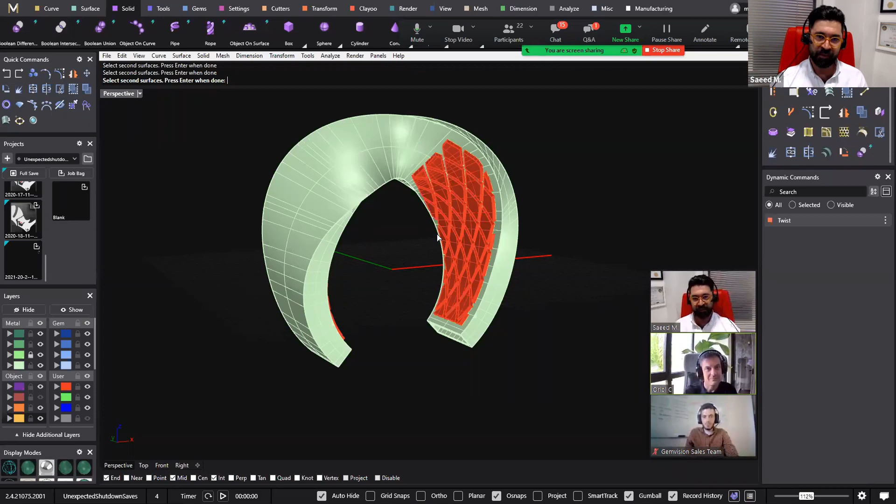Something people are sometimes wondering: how do I know if the command is running? If you move the cursor to the right, the cursor keeps spinning, so it's telling you that the operations are still happening. That's right, yes. And I hit enter.

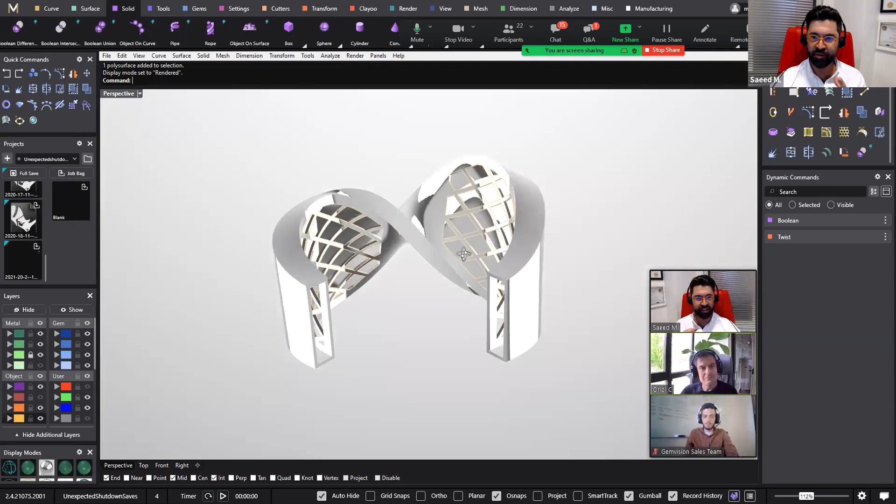And it gives me, when I turn off this and also the red one, a beautiful pattern here, as you can see. When you turn the ring upside, you don't see any lace pattern. When you see the bottom, you will see the patterns, which helps you for casting, for filing, or magnet polishing — the teeny magnet pieces get out from this lace easily.

And I will turn on the rest of the ring. Where was it? Which color did I put it? Here? No, it's here.

Also you can change the layer from here. This is an open polysurface, so I simply click on the Cap Planar to make it a closed polysurface. In the last step, you can do the Boolean union, which is dynamic again from this object. Press enter, and the second one, press enter. And when you see it like this, it's successfully done.

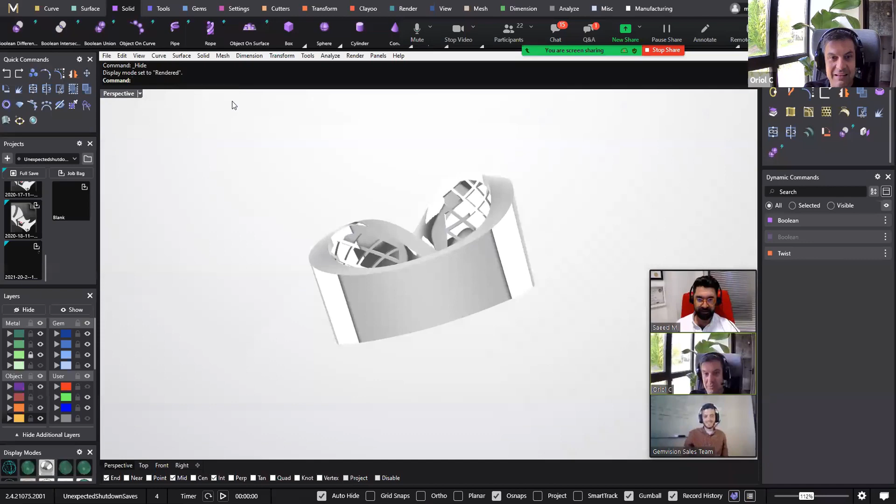Amazing. And Saeed, we didn't get many messages, and I believe it's because everyone was super excited watching you designing. I was sitting here like, did you like it, Bo? Did you like it, Oriol? Oh yeah, I love it.

We do have one question for you, Saeed. Tina is asking when the English version of your book will be available. We are converting to MatrixGold because it was originally for M9. There are something like 5,000 images we have to open and redesign all the models inside the book, make screenshots, take them to Photoshop, and then paste them in InDesign. I put 4 of my designers working from morning to afternoon on this. Then we give it to Gemvision, and Gemvision can give it to the license owners of the book, and also everyone can buy it.

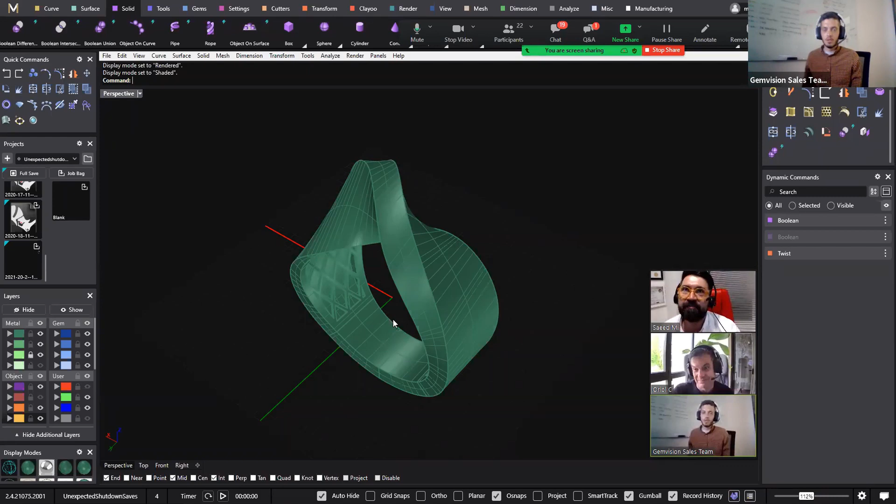Nice, it's amazing, and more than 700 pages. Do you have an estimated date? It's very hard. Bo is pressing you, Saeed.

There are two sorts of the book, book 1 and book 2. For book 1, I think by the end of July or maybe August, let's say, we can have it. Gotcha, got that, July, August.

As far as the model, I love it. I think a lot of people in MatrixGold get focused on solely using parametric commands, which are absolutely great, but it's also good to know the fundamental commands as well. Some tricks, you know, when you're using the twist command, it gives you a very smooth form. And the last thing for a good render, it's always good to make sharp edges a little bit filleted.

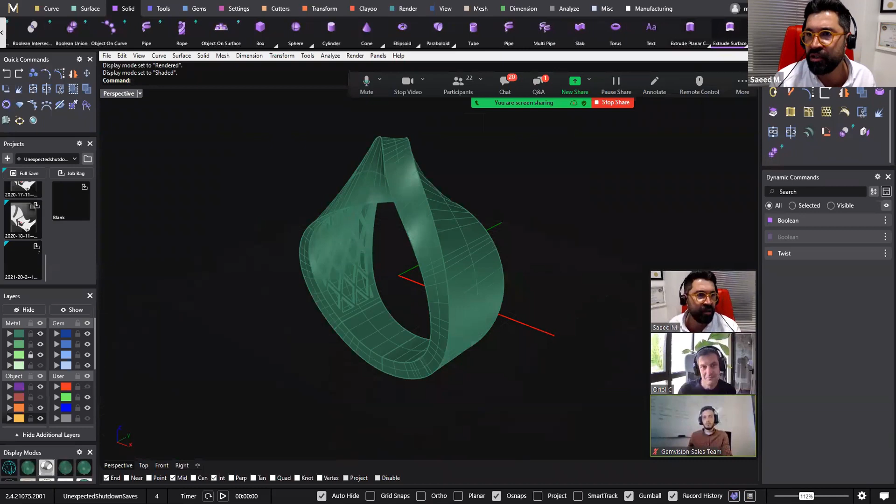Do we have time? I believe people can stay for hours just watching you, so don't worry.

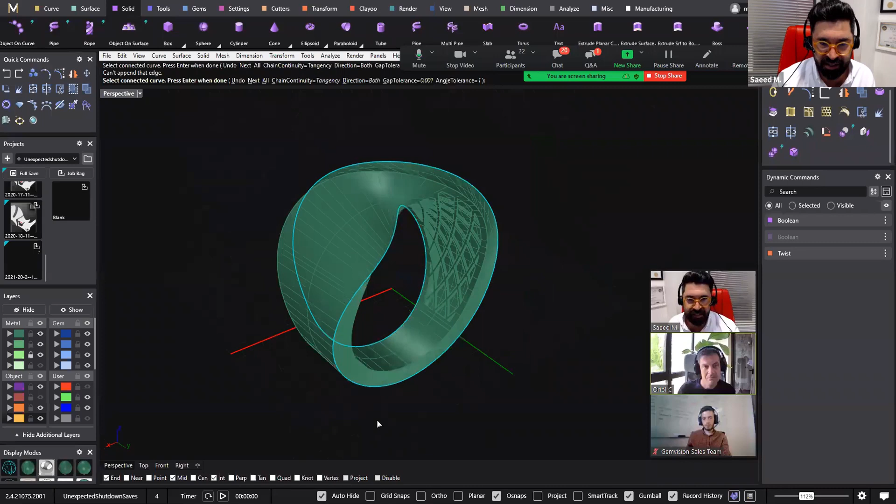Okay, thank you. I do something like 0.20 or 0.15 and click on chain edge and click on this edge, and also this one. Let me see why it does that. Oops, okay, again.

Fillet edge and chain edge, and I click one curve and the next one, and also here. You can see this complicated curve. Turn it around the model - you see, we have a nice fillet here and another one, chain edge, with the same amount. And that's it, that's really it. You have a very smooth and nice surface here.

Very very nice. I really like it. Let me show you the render. So, I think after the meeting we had on Monday with Saeed, we were expecting something like that. But for everyone attending this webinar today, I think this has been a very, very good session.

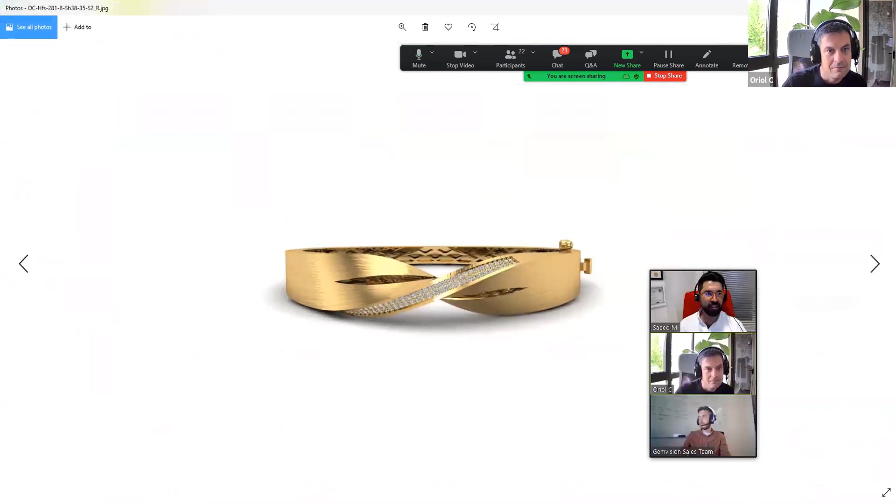Oh, absolutely. And this is the production model in my hand. You can also do bangles - you see there are bangles. You can make it filigree and make it with pipes. You can do many models. As you can see here, it's twice 360-degree twisted using the twist command, and you can have the stripped lines. You can pave diamonds here, gems here, like this one. This one was done in M9, but it's easier - totally easier in MG.

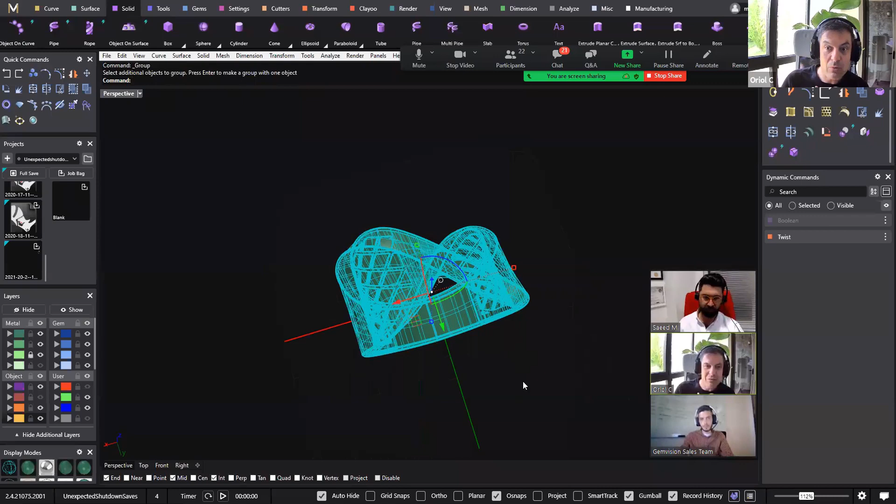We have questions asking if we can have a pave command in parametric. We already have pave here, and as you were working with surfaces, Saeed, probably you would be trimming a surface and then using it to place a pave. Many times when I'm traveling, people ask if we can have a parametric pave command, but that's hard to have. The reason is, depending on how big the surface is, if you make it bigger and want to recalculate parametrically, we don't know which stones you want to add. If we did it automatically, we wouldn't know if you want 1.3 stones or 1.5 stones. So what we think from the development side is we need a tool to make paves as easy as possible, so in just a few clicks you get a pave. In case you need a bigger surface, you just run the pave tool again, instead of being parametric, we make a very easy tool to place the pave.

Let me add something about the pave in MG. If I compare it with the auto pave in M9 and MG, in MG it's much better and easier because when you do the pave, the first thing it does is make it give you more precise stones. Also, when you do the stones in the pave command, you can simply remove which stones you don't want, and you can rescale them one by one while still in the command. It's very good.

We're still getting a lot of feedback about the Pave, and for sure that's because we know there are countries using it a lot, so we will keep improving it.

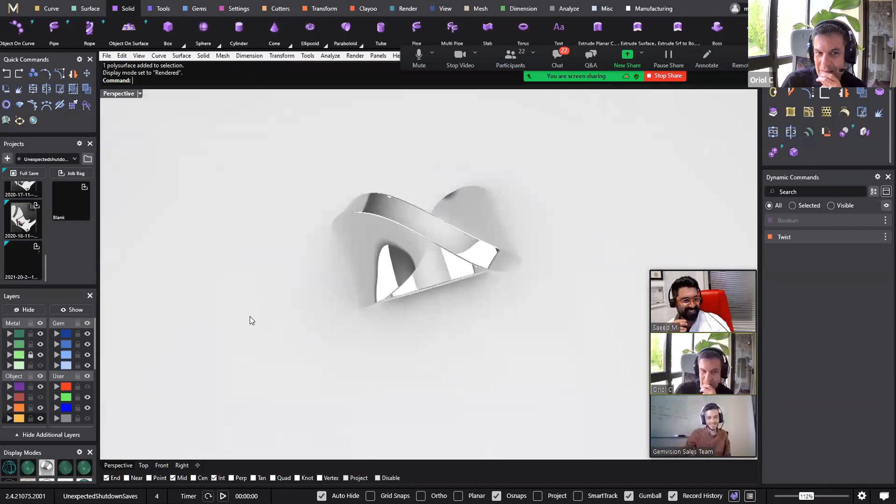Awesome, I can't wait to see what this does whenever they post it on social media. I was thinking the same. Our marketing colleague Yzette, if she has seen that, tomorrow first thing in the morning she will be publishing it for sure.

Good, I'm happy to hear that. Saeed, thank you so much, man, it has been a very good session. I really enjoyed how you showed the whole process, we are lucky to be talking with you. Today I was having a meeting with our company and telling them that sometimes we talk a lot about the software, but it's good to let everyone know the whole process from the sketch to the CAD design and then printing and casting. Today I feel like you've been showing us this whole process, so thank you so much. It has been a very interesting session.